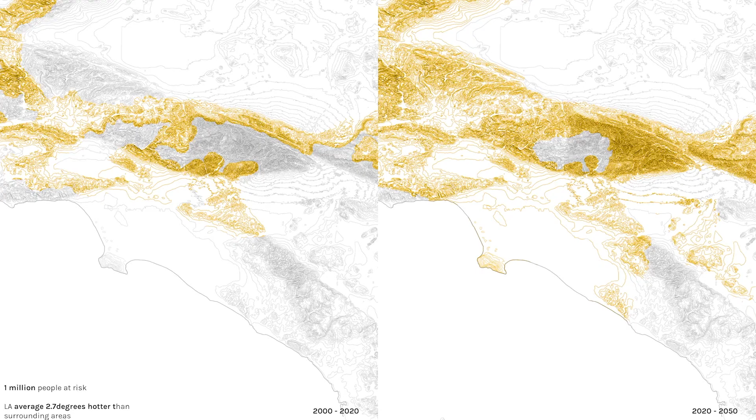Already, climate change has begun to create deep impacts, which has a direct relationship to the areas projected to experience greater and more devastating wildfires. In fact, in 2019 alone, the amount of money lost in real estate to these fires has been to the tune of a staggering $80 billion.

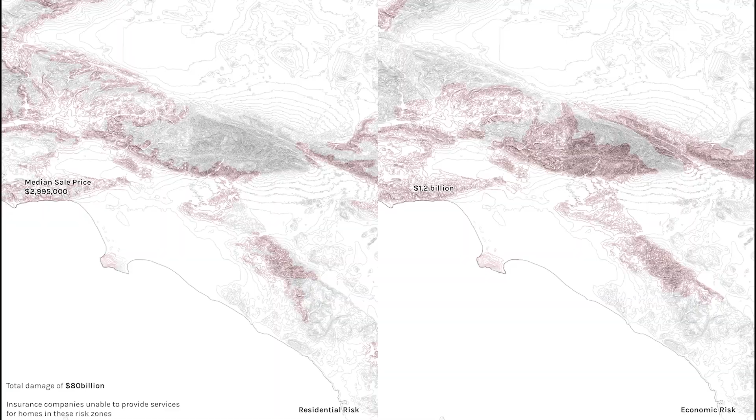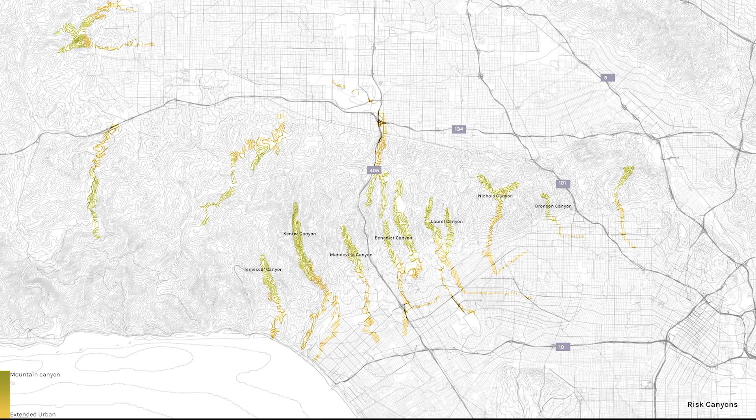Research shows that the spread of these wildfires is also linked to topography. Hillside slopes are directly proportional to the intensity of the spread of the fire. Of these hills, canyons and valleys are the most dangerous. Single-axis roads with no escape routes and steep slopes caused by construction put these residents at the greatest risk.

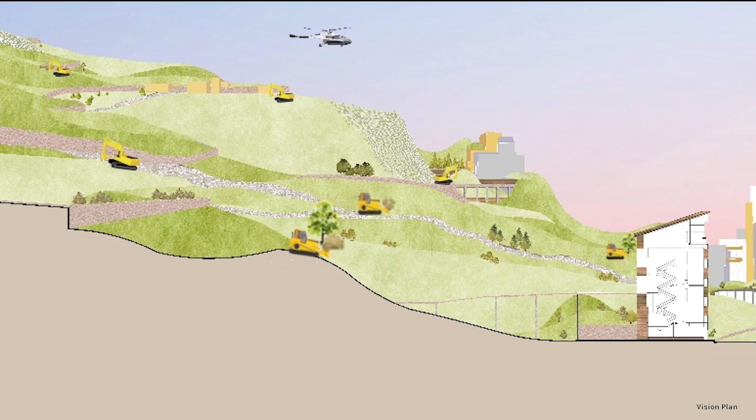The third mountain alters the slope of hillsides to stem the spread of fire. The third mountain is created by cut and fill, taking land from these mountains in order to reduce the slope and extending the excavated earth as fingers into urban areas. Bulldozers are used to carry soil, trees, and other landscape elements from the original mountain down to the flatlands to be used as new building and landscape material. It's as if the first mountains are finding a new way of expression through the third mountain.

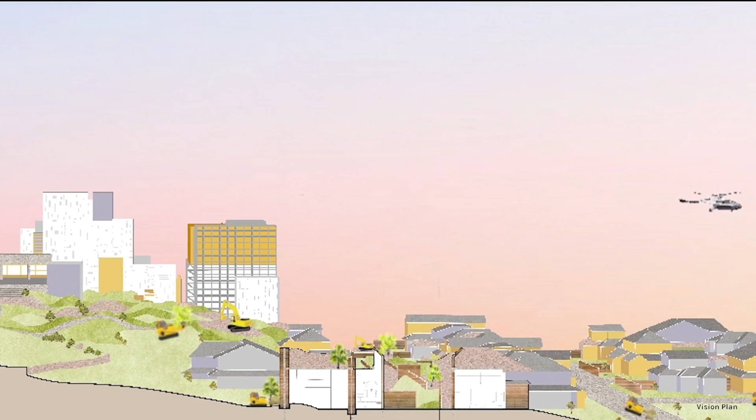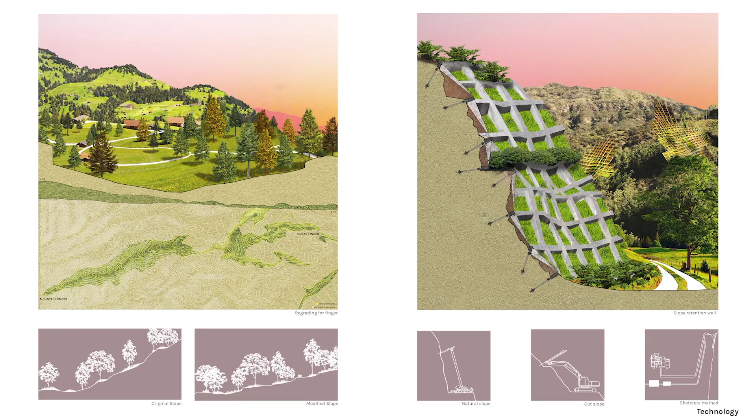The finger connects with the city along roads, incorporating existing built components like metro lines and unused parking lots to create a new urban experience for Los Angeles. In these diagrams, you can see the cut and fill technique used to create the fingers. The slopes are modified to a 50% fire belt, and in order to stabilize these new slopes, a concrete grid retaining wall with fire-resistant landscaping is built.

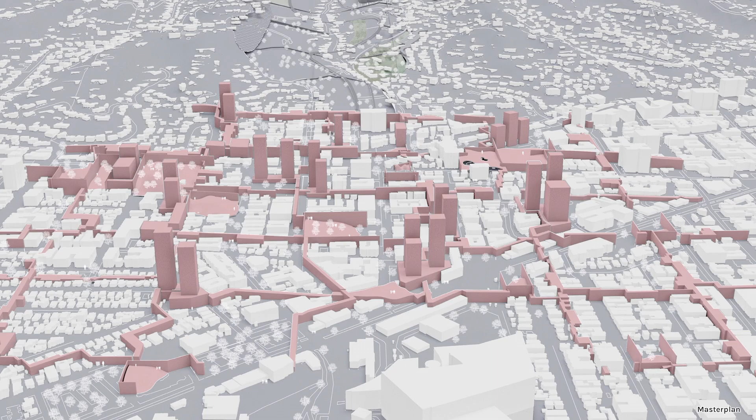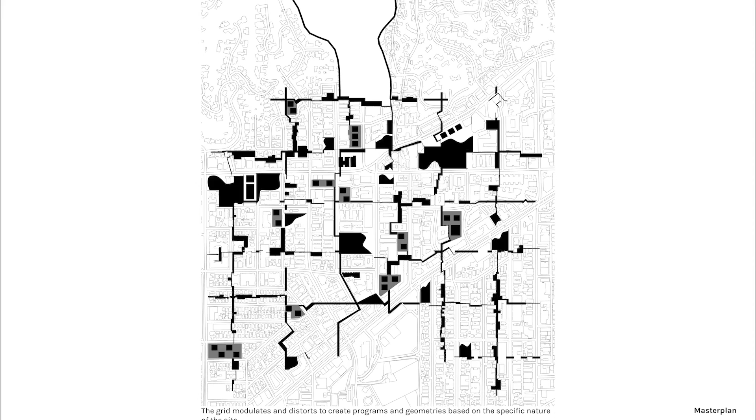The earth that is brought down is used to create a new master plan. It takes the form of rammed earth architecture strategically inserted in the existing urban fabric, a sustainable building material. This process ensures that building material need not be transported from far-off places. Mountain soil from the valleys is regraded and collected. It is then distributed as a new grid that is overlaid over the street. This grid is then distorted and modulated to respect existing landmarks.

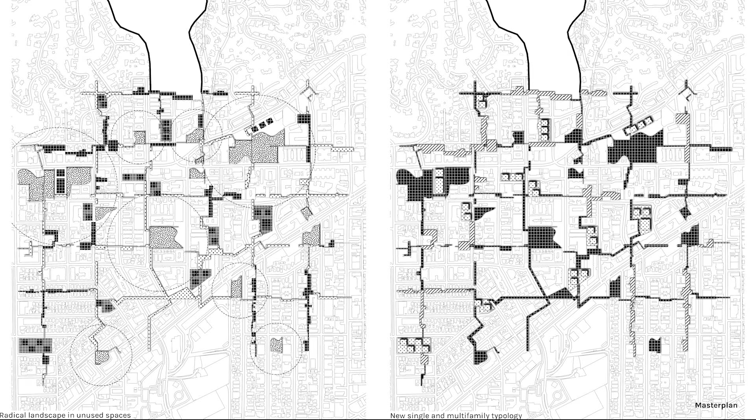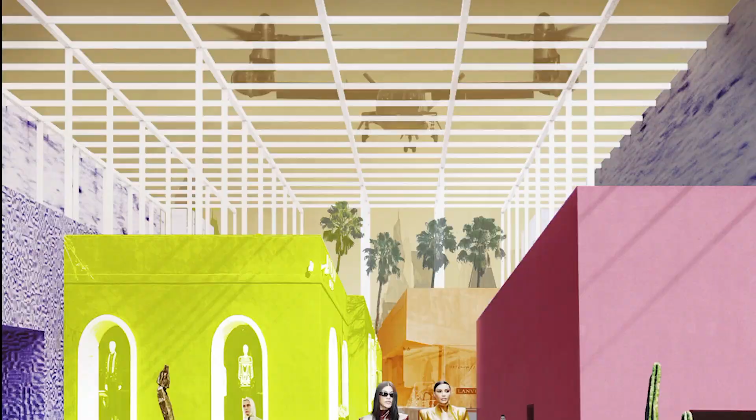In this side of West Hollywood, the grid conforms around historical landmarks like Sunset Strip, preservation landmarks, and roads with high traffic. In 2050, the air quality is much worse, and the outdoors aren't the ideal place to enjoy the city. The city has transformed. Life in 2050 is all about learning to live alongside wildfires and its consequences.

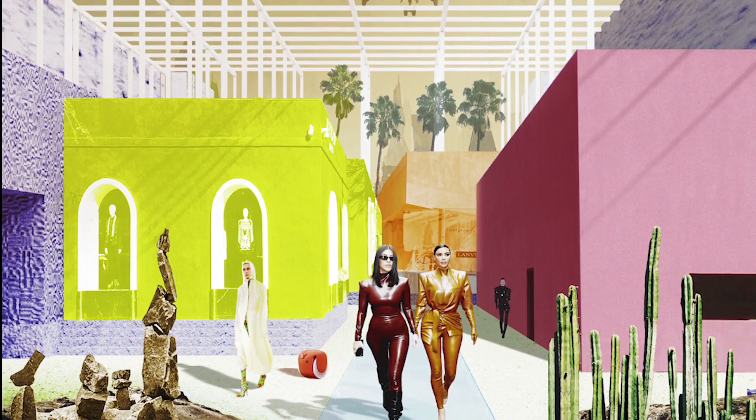The third mountain manifests itself in earth as a new materiality, as a construction material and landscape element. We leave the old days' glamour in the mountains behind and create new Los Angeles glamour down in the flatlands, where we are required to spend more time in controlled and covered environments. A new story of living indoors in artificial nature begins here.

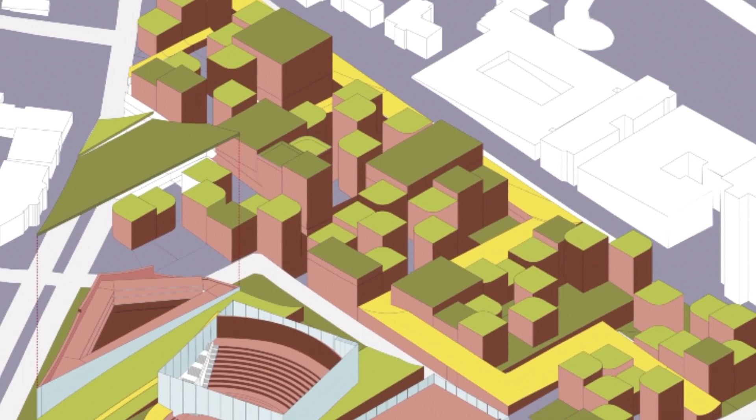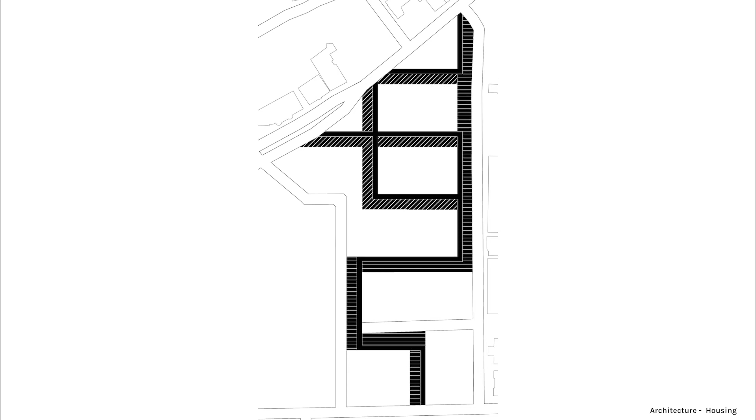Our proposal includes two scales of architecture, a radical landscape and a housing community with largely interior-based spaces. The houses in the settlement follow the same zoning of single-family houses that is characteristic of Los Angeles, while the radical landscape creates larger spaces within that can be used for a range of activities. Circulation begins with the main pedestrian path from the master plan and then branches out into private roads for the houses, creating house blocks. The courtyards are designed to provide privacy while maintaining visual communication.

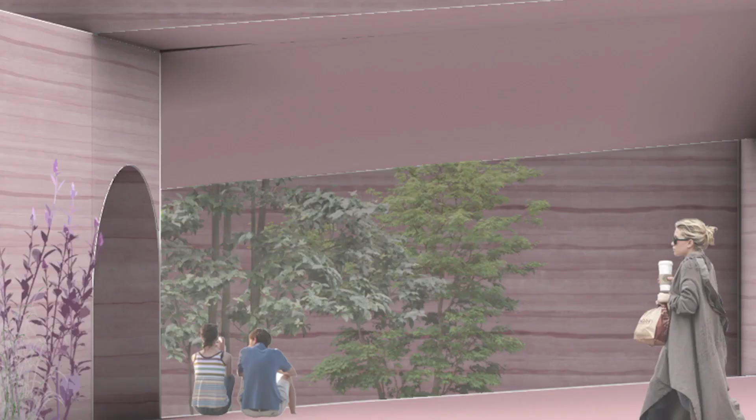The rammed earth architecture follows the general slope of the land. Covered and semi-covered walking paths, landscape views, and small social spaces are unique characteristics of the complex that are the result of the third mountain's architectural method and material. The radical landscape comprises public buildings that can be used for varied purposes. It is stepped from Sunset Boulevard to Hollywood Boulevard with rammed earth retaining walls.

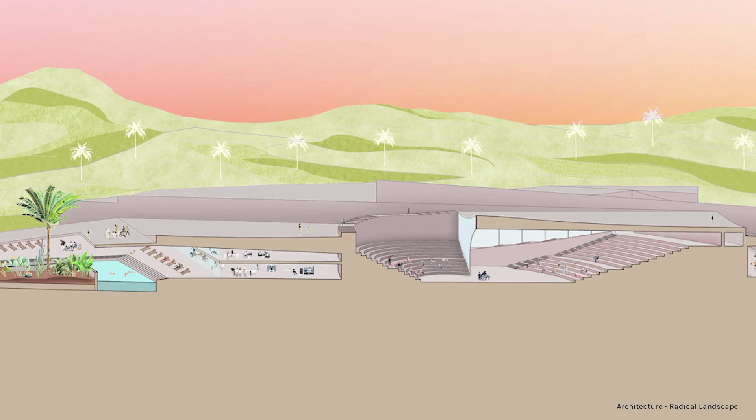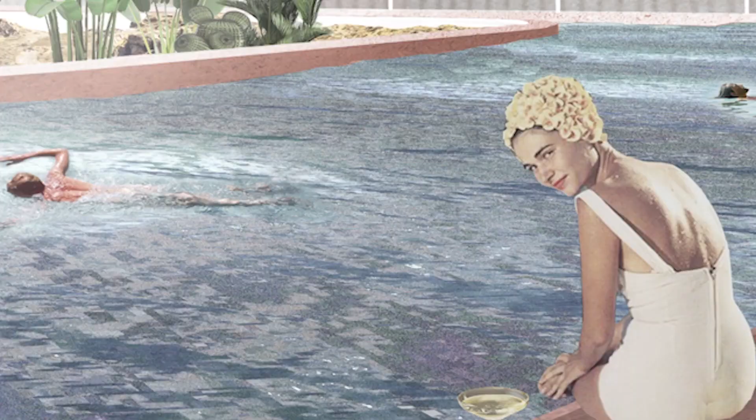A combination of this landform itself and deliberately created artificial nature is the new aesthetic that we envision. Along the side, the architecture is embedded into the scalloped earthform. A combination of underground and open-to-sky areas creates a new experience for interacting with nature in 2050.

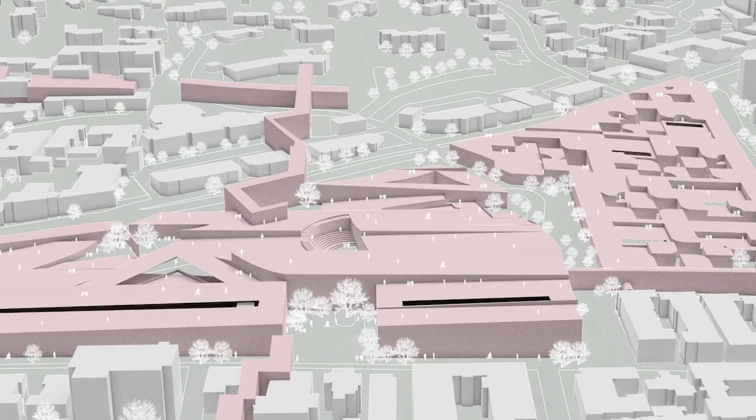If the first mountains of Los Angeles were formed naturally, and the second by post-war clearance and demolition of mountaintops, then the third mountain synthesizes nature and artifice into an architecture made up entirely of the materiality of land. It embraces its artificiality in the urbanscapes. The first mountain has found itself transported and transformed for an indoor life in 2050 LA, rising to the challenge of new age climate threats.